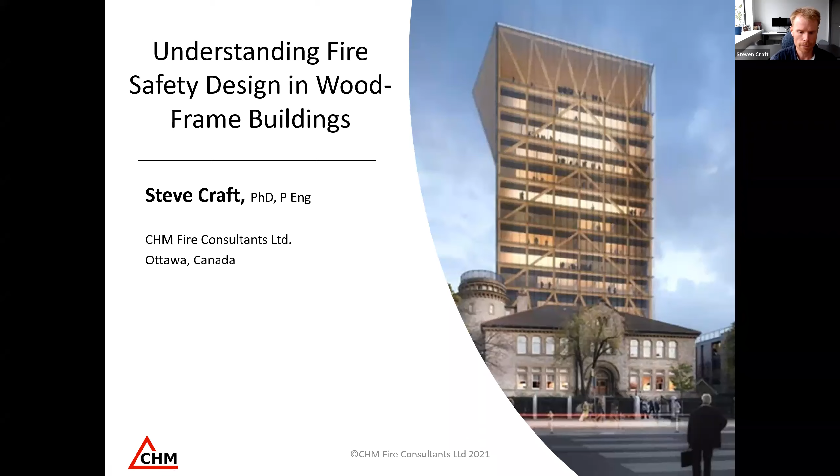So in today's presentation, we'll just briefly go over the mid-rise construction requirements that were added in 2015 to the National Building Code. This was a big change, of course. Before the 2015 National Building Code, buildings were limited to 4 stories of light frame wood construction, combustible construction. With the changes in 2015, buildings can now be built up to 6 stories, and it created a new group of buildings that we'll look at.

After we review that, we'll look at fire resistance. In particular, we'll take a look at the test method. I think it's helpful to look at the test method and remind everyone how we actually test assemblies for these buildings, and then look at some of the design options for light frame wall and floor assemblies. We'll also look at exterior walls. The 2015 mid-rise provisions for combustible construction include some requirements for exterior wall assemblies, such as testing to CAN/ULC S134, which previously didn't really apply to combustible buildings. So that was new. And then lastly, I'll get into a little bit on construction site fire safety, just touching on some of the highlights with respect to that. Again, we could easily spend the entire presentation on that alone.

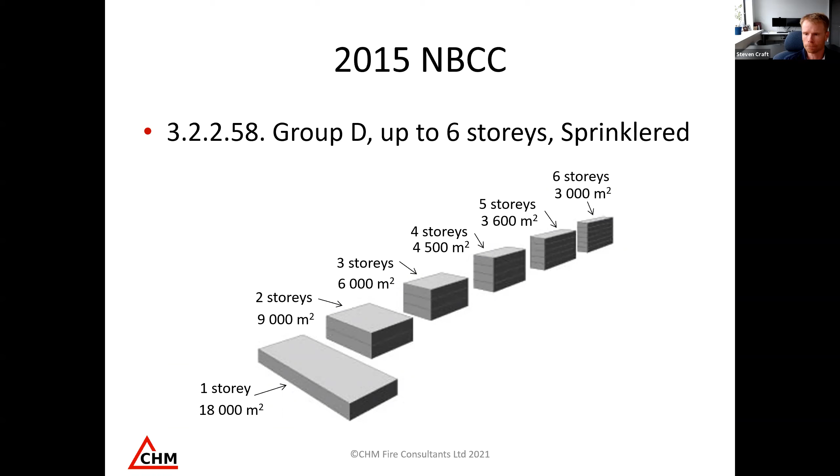Just a bit more on these buildings and what's permitted. In addition to residential occupancy, Group C occupancy permitted up to 6 stories, there are allowances to incorporate Group A Division 2, so that might be a cafe or restaurant on the first 2 stories. Group E mercantile could be a store on the first story. Also storage garages, basically underground parking or parking up to the 3rd story. So there are allowances for mixed occupancy in the buildings.

And of course, in some of those cases, if we have Group A Division 2 or Group E occupancy, then we'll have an increased fire resistance rating for the fire separation between the occupancy and Group C.

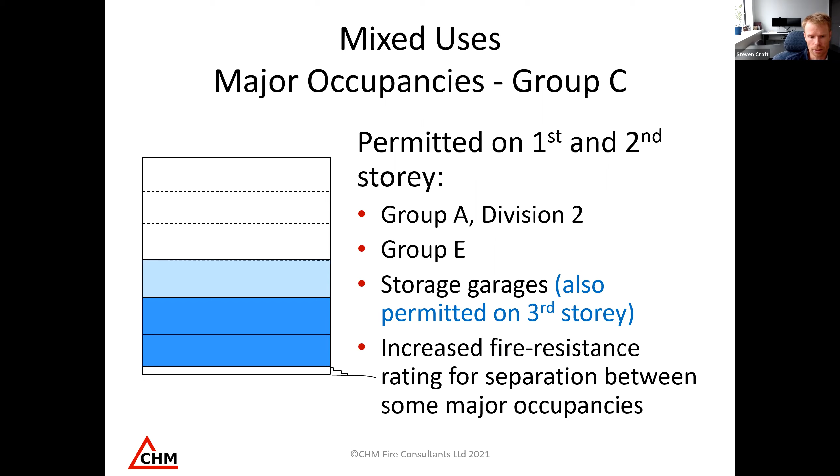Similarly, for Group D occupancy, we have Group A Division 2 and Group E on the first 2 stories, storage garage permitted up to the 3rd story. But in addition to those, which are also allowed for residential buildings, we also allow Group F Division 2 and 3 on the first 2 stories.

I think these provisions recognize the increased use of mixed use buildings where we have either stores or restaurants on the first story and residential above. These provisions for mixed occupancy are used quite often.

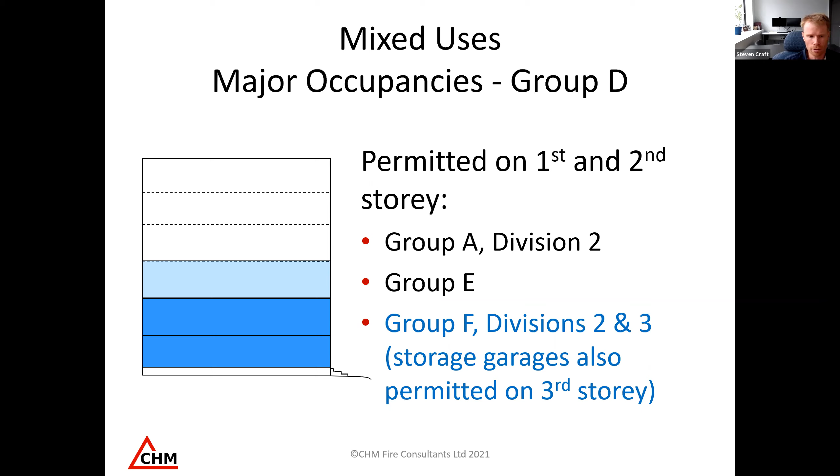Some of the restrictions placed on these buildings, the first being the height of the building. This ensures a 6-story building doesn't end up being a 12-story building with a mezzanine on every floor. The height from the first story to the uppermost floor level is limited at 18 meters. So whether it's the 6th floor or a mezzanine above it, that top uppermost floor is limited to 18 meters above the first floor, keeping the height of the building in check.

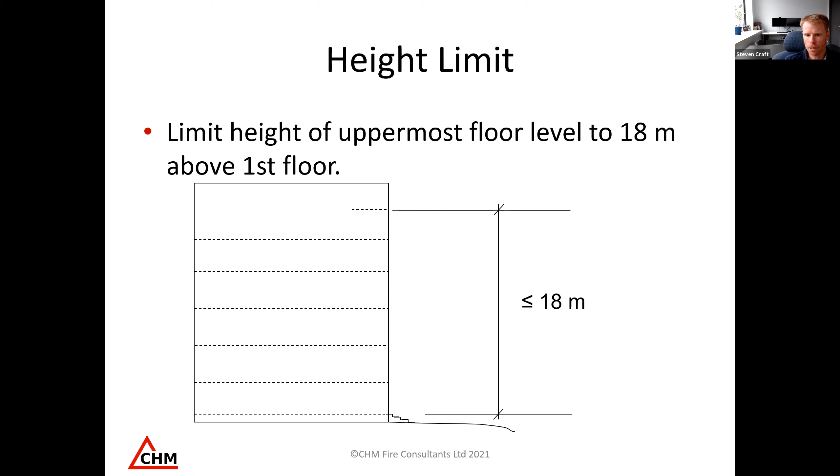Additionally, something that isn't otherwise required in the building code is the fire resistance rating for the roof. Typically in a sprinklered building, in the National Building Code, there's no requirement for roofs to be rated. However, this is an exception where, to increase fire safety, they've added a fire resistance rating for the roof of 1 hour, similar to the rest of the building.

There are requirements if the roof is less than or equal to 25 meters in height from the first floor: the roof covering has to be class A, B, or C, and the roof itself can be combustible construction.

However, once the roof goes over 25 meters in height, it has to be either non-combustible construction or fire retardant treated wood construction with a class A roof covering. So as the roof height increases beyond 25 meters, provisions for non-combustible or fire retardant treated wood roof construction come in, which can be a bit challenging. Generally, roof heights are kept below 25 meters where possible.

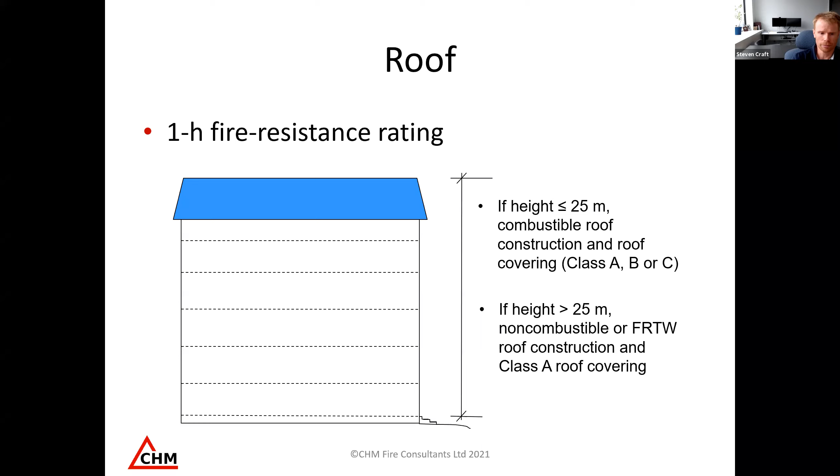The next big change that allows for these 5- and 6-story buildings to be constructed is an upgrade of the sprinkler system. For those unfamiliar, there are 2 sprinkler standards typically applied to these types of buildings. Up to 4 stories, NFPA 13R was permitted for residential buildings in previous versions of the code, as well as the current version.

There are certain relaxations under NFPA 13R that aren't required under NFPA 13. For instance, one of the big ones is the attic space: for a building sprinklered to NFPA 13R, the attic space does not require sprinklers, whereas if it's sprinklered to NFPA 13, it does. Other things like small closets — NFPA 13 is more restrictive on treatment for combustible concealed spaces.

Things like elevator machine rooms and penthouse equipment rooms need to be sprinklered in NFPA 13, whereas they don't in 13R. Overall, designing the sprinkler system to NFPA 13 will generally result in a greater sprinkler density, greater water density being applied to a fire in the event the system activates.

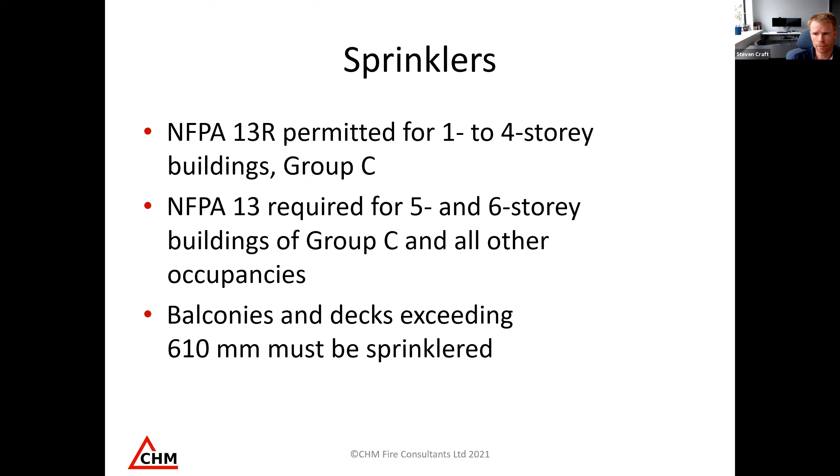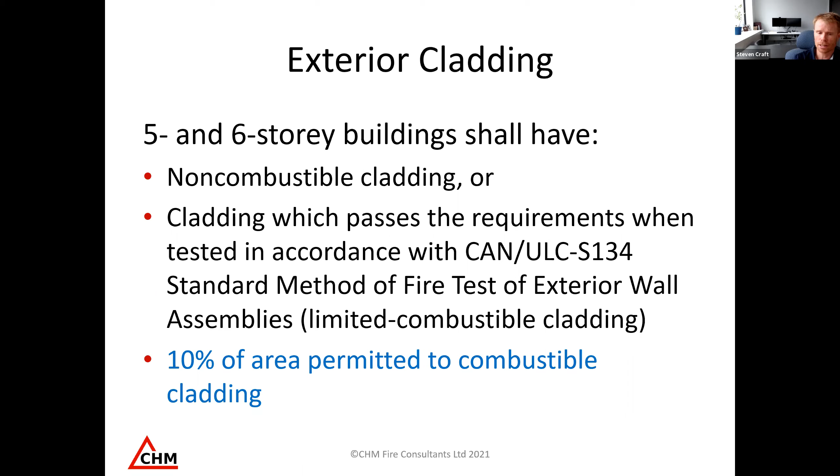In addition, for these 5- and 6-story buildings, the cladding must be either non-combustible or pass requirements when tested to ULC S134. I'll come back later and take a quick look at that test method. There is an allowance for 10% of the area to be combustible cladding, so a small area can be combustible, but otherwise it needs to either be non-combustible or meet ULC S134 for those 5- and 6-story buildings. If it's using the greater areas but is only 4 stories or less, combustible cladding can still be used.

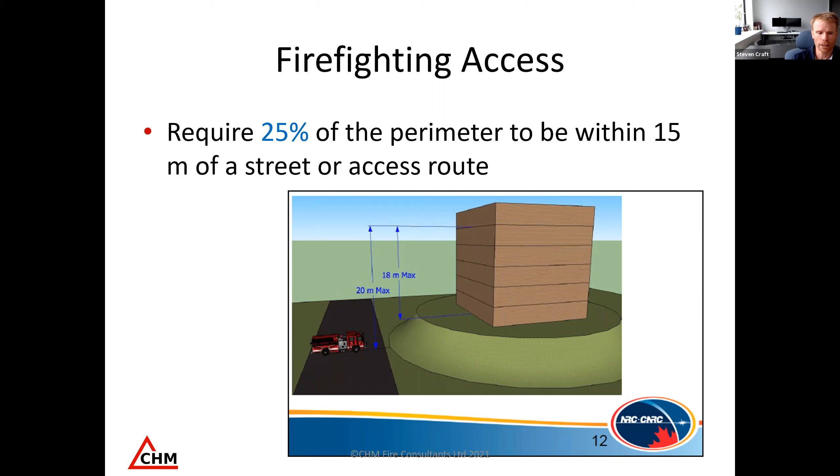Another aspect for firefighting access: in addition to the maximum height of the building of 18 meters from the first floor to the top floor, there's also a maximum of 20 meters from the access for the fire department to the top floor. That allows for a 2 meter drop between the first floor and where the fire department access is. If the fire department access is below that, it limits the height of the building. There's also a requirement for 25% of the perimeter of the building to be within 15 meters of a street or access route. This is for firefighter access, and depending on location, if it's an infill project, that can be a limiting factor on the building size.

Just a couple other changes to the code for these mid-rise provisions. One aspect is fire blocking, and generally there are more requirements for fire blocking, so smaller areas are permitted unless the areas are filled with non-combustible insulation. That's another case where combustible concealed spaces are addressed in a more rigorous way. Also, the emergency power supply for lighting and fire alarm systems is doubled in duration to 1 hour.

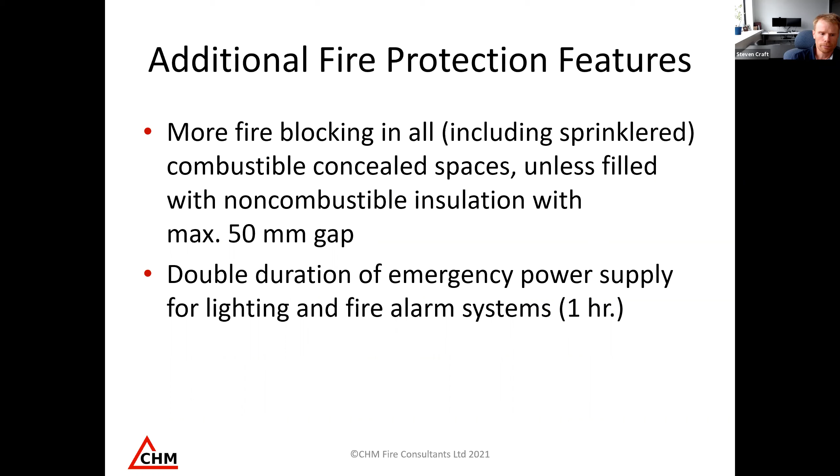You can appreciate some of these changes, particularly the sprinkler system, really add to the fire safety of the building. In general, out of everything we do in building design for fire safety, nothing compares to sprinklering the building. When the building is sprinklered, from a risk perspective, looking at risk to occupants and risk to property, there's no other change to the building we can make that will come close to offsetting the risk that the sprinkler system provides. They're very effective, and that's why they're required.

One of the aspects that needs to be considered in building 5- and 6-story buildings is shrinkage. Generally, engineered wood products are largely used on these projects, so we don't see large amounts of shrinkage in any one member, but when we build 6 stories, it's a cumulative effect from story to story. The structural engineer will design for shrinkage, the structure itself, and any interconnection between the structure and things like elevator shafts, or if the exit stairs are non-combustible construction.

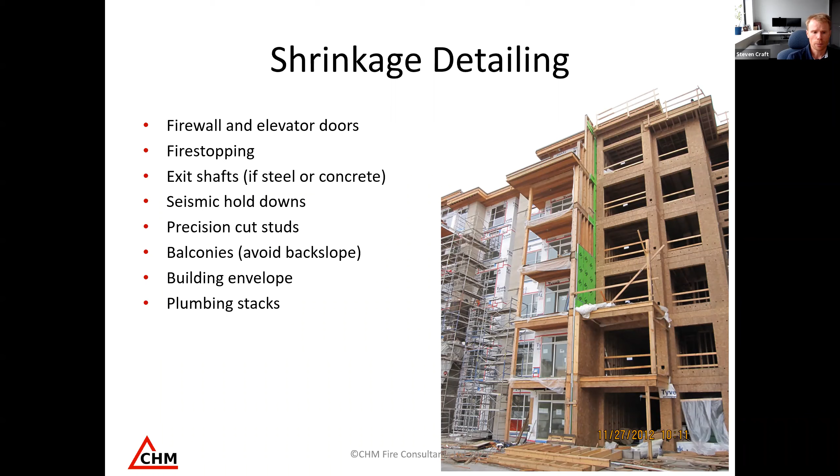And so that's something that needs to be accounted for. Which brings me to the next issue: firewalls. Shrinkage and firewalls need to be taken into account, because firewalls are not going to settle or shrink to the same degree, perhaps not at all. So we need to allow for some movement between whether it's a masonry block wall or a proprietary gypsum board firewall.

Typically that movement allowance would be provided by the structural engineer. There are ways, of course, to minimize that movement, whether it's precision cut studs and prefabricated walls, or the use of engineered wood products that generally have lower moisture content or less shrinkage.

With respect to firewalls, we see both masonry block as well as proprietary gypsum board firewalls being used. I will say that not all municipalities currently accept proprietary gypsum board firewalls. There are challenges in detailing those. Generally, when gypsum board firewalls are used, there are no penetrations put through those walls. Often doors are required, and in some cases we see that in the vicinity of the firewall within the corridor, where the doors will be, it's masonry block, and then outside of that it might be the gypsum firewall.

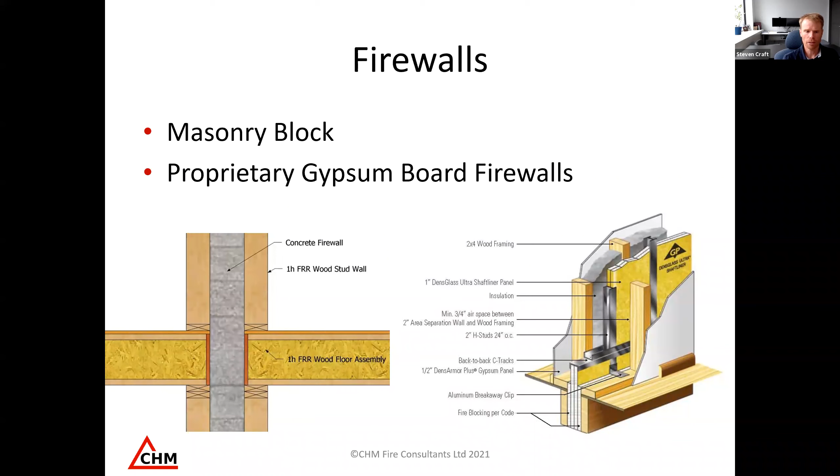So at this point, we'll move on to fire resistance, and I'll touch on the test method a little bit, and then speak briefly to design and what the options are.

Likely everyone's familiar with the fire resistance test method, CAN/ULC S101, in terms of the code requirement for fire resistance. Generally, when we require fire resistance, there are two primary objectives we're trying to achieve. The first is to prevent the spread of fire from one compartment to another, whether through temperature rise on the backside of a wall, or penetration of hot gases through that wall or floor assembly, which might allow ignition on the other side. The other aspect is to prevent collapse of the structure. For that reason, when we test for fire resistance, if it is a load-bearing structure, we'll test it under load.

In Canada, we have CAN/ULC S101. You may come across tests conducted in the US under ASTM E119. This US test method is almost identical to the Canadian standard. There are a couple of small differences, but in general, when tested to the ASTM method, it's likely applicable in Canada. Other parts of the world, including Europe, Asia, Australia, and New Zealand, use the ISO method, ISO 834. It has a slightly different temperature exposure, so it's not very common that someone looks to use an ISO 834 test in Canada, but from time to time it does happen.

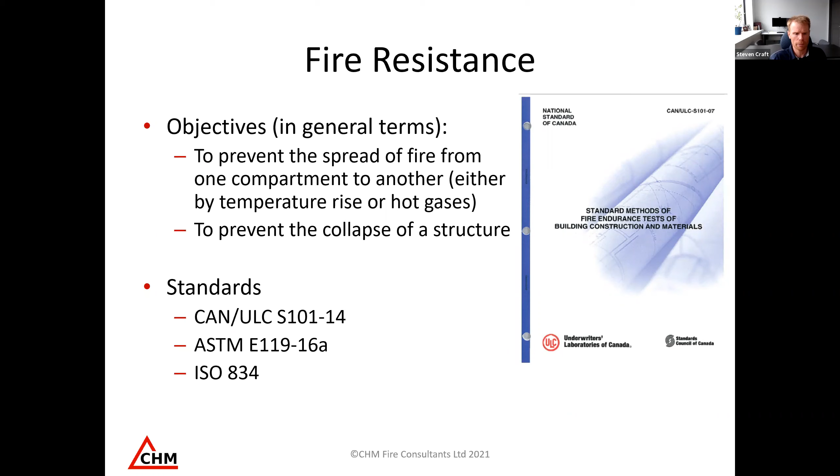So just a little bit on the test method, and we'll look at the furnaces we test these on. In general, we're trying to test construction that's representative of what's being built in the field in terms of materials and workmanship.

When we're testing a load-bearing wall, for instance, we'll load it in the test frame, and we'll see that in a second. Of course, walls may or may not be load-bearing. Floors are always load-bearing, and beams, columns, and other structural members will always be load-bearing.

To give you an idea of the size of assembly we're testing, in the standard test most furnaces are on the order of about 10 feet by 10 feet. So for a wall assembly, that's the size we're testing, in order to extrapolate those results to walls that are taller and wider. Similarly for floors, a typical floor furnace is on the order of 4 by 5 meters, or perhaps 14 feet by 19 feet, something on that order.

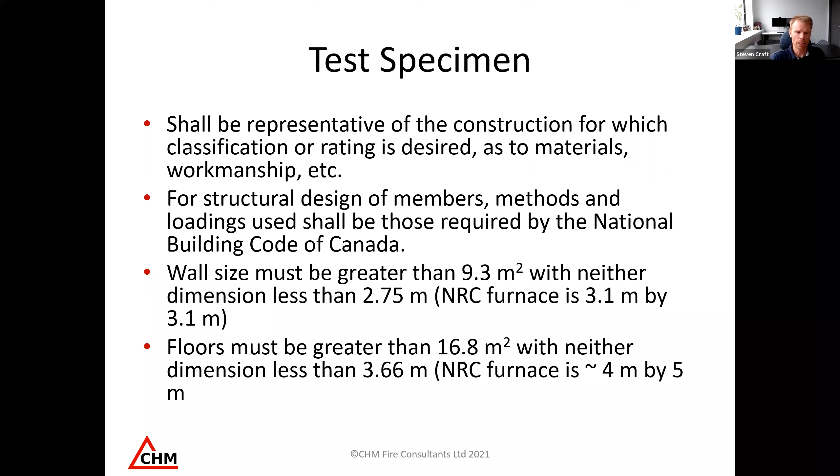Just quickly, in terms of the fire exposure that we're applying to a wall or floor assembly, or perhaps a column, the intent originally is to represent what we call a post-flashover fire, so a fully developed fire in a compartment that's limited in size only by the oxygen able to get into that compartment. In the first 20 minutes or so, we're already up to probably about 750 degrees Celsius, so that's already getting very hot.

And of course, at an hour, we're at about 927 degrees Celsius, and over 1,000 degrees Celsius at 2 hours. This curve does continue out to 4 hours, but most assemblies we test are 1 or 2 hours, perhaps, or less, 45 minutes.

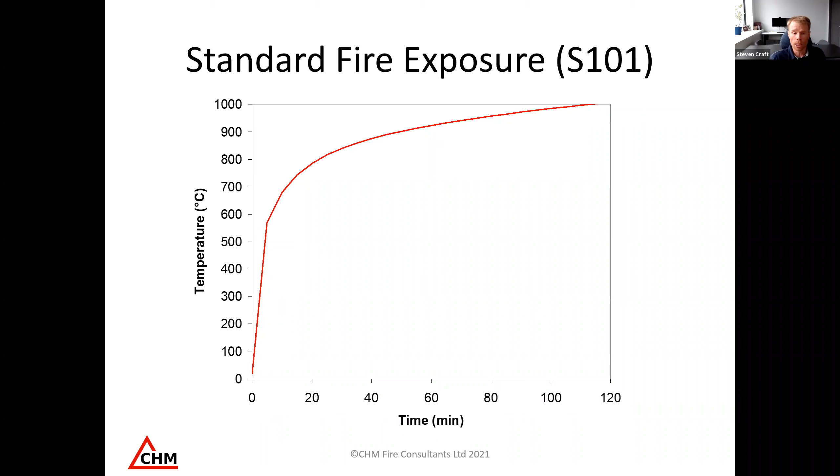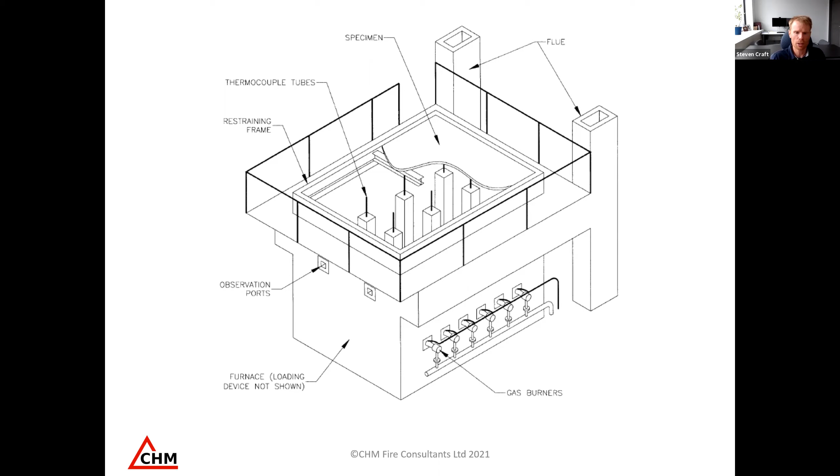Usually there's observation ports that allow us to see inside, and we have the floor assembly, which sits on top and makes up the top of the furnace. There's thermocouples measuring the temperature just below the floor assembly, and so the furnace is controlled to follow that temperature-time curve from the previous slide. What's not shown here is the loading applied to the top, which we'll see in the next photo.

Similarly, for a wall furnace, same kind of premise where we have a plenum where the gas burners are reproducing the temperature-time curve within this plenum. We have thermocouples measuring the temperature in that space, reproducing that fire. We have viewing ports on the sides, and then a test frame where the wall assembly sits. Usually there's hydraulic jacks either above or below that allow the wall to be loaded.

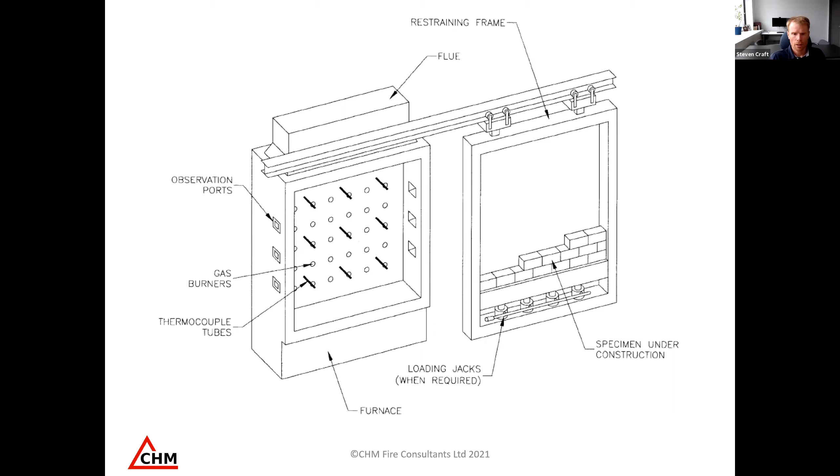So just a quick note on load. Generally speaking, when we test for fire resistance, we load wall and floor assemblies to basically the full design load. In the standard, it's called the full specified load condition. That's generally how we test assemblies.

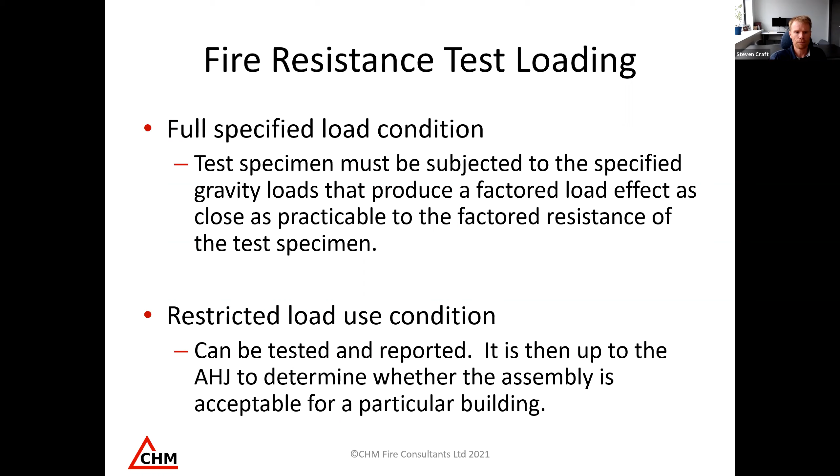However, in some cases, for one reason or another, we may decide to test at a lower load, and then that would be reported, whether in a test report or in a subsequent listing. There would be a restricted load use condition, so there'd be a restriction on the load that could be applied for that particular fire resistance rating. So that's one thing to watch out for.

I think it's important to understand the failure criteria for fire resistance. There are 3 failure criteria, and all 3 may not apply to every assembly. So for instance, if we're testing a wall assembly that's load bearing, all 3 of these would apply. First is transmission of heat.

So first is transmission of heat: during the test, the average temperature measured on the unexposed side of the wall shall not rise more than 140 degrees Celsius above the initial temperature at the start of the test, or 180 degrees Celsius at any point. That's looking to prevent fire spread from one side of the wall to the other.

Second is support of the load: the test specimen shall sustain the applied load throughout the test. And lastly, passage of flame or hot gases: the assembly shall prevent the passage of flame or gases hot enough to ignite a cotton pad on the backside. So this is really looking at the ability, again, to contain the fire.

So you can appreciate for a load-bearing wall, all of these would apply. For a non-load-bearing wall, only the transmission of heat and passage of flame would apply. And for a beam or column, only the support of load would apply where it's not a fire separation.

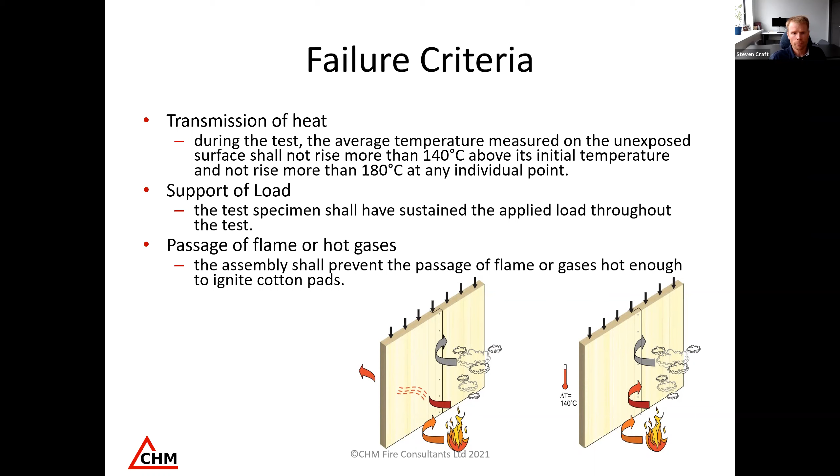Generally speaking, these mid-rise wood buildings, anything 4 stories to 6 stories, are going to require a 1-hour fire resistance rating for the floors and the supporting structure. In light frame construction, that would be the walls requiring a 1-hour rating. If we have mixed occupancy, such as mercantile on the first floor, or perhaps a restaurant, A2, then we'll have a 2-hour fire separation between that occupancy and the occupancy above, if it's residential. But for the most part, these are 1-hour fire resistance rated buildings.

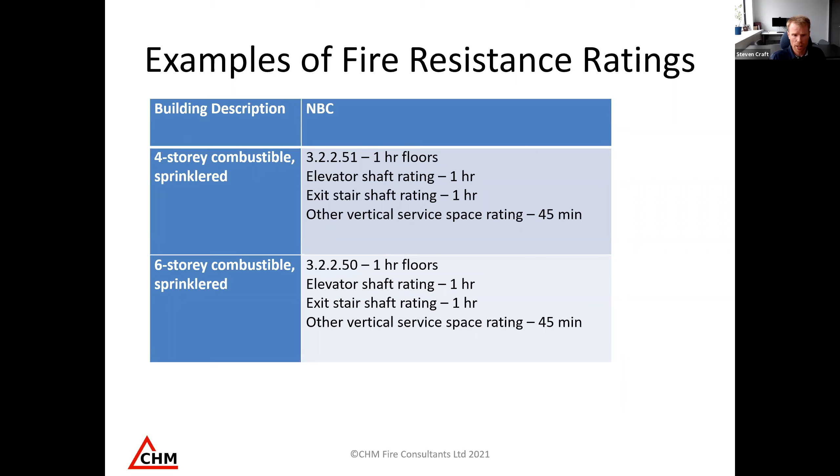If we look at, from a design perspective, what are our options to design the building for fire resistance? First, there's a component additive method in Appendix D of the National Building Code. It's been significantly improved from the 2010 version, with a lot more combinations of assemblies now that can be designed using it. We'll take a quick look at that.

And then, of course, there's listings from whether it's ULC, Intertek, or QAI. Those listings can be found in the published directories from each of those organizations, although sometimes those directories can be a bit cumbersome to find assemblies in. Other methods: often manufacturers in their literature will cite their listings and provide links or at least listing numbers. Another great resource is the Gypsum Association's design manual. They have many light frame, wood and steel frame assemblies in that manual, and where applicable they will reference the listing if there is one, or perhaps other test data used for that assembly.

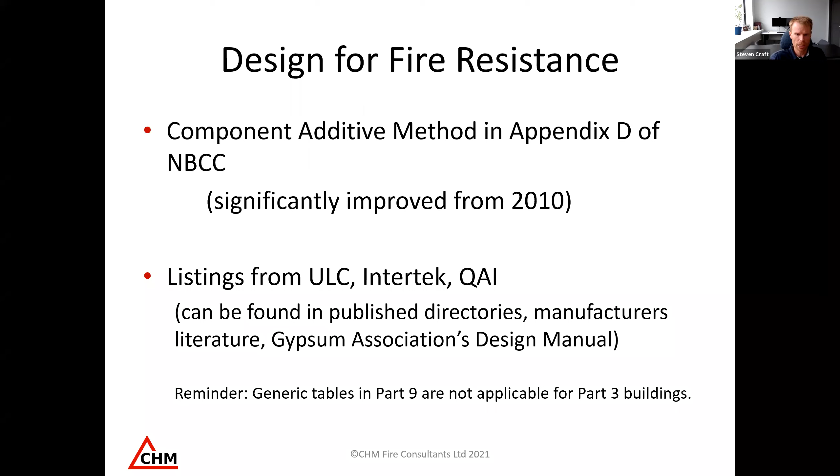So if we just look quickly at the component additive method: the original version was based on tests completed in the 50s, 60s, and 70s, and it wasn't significantly updated until the last edition, the 2015 National Building Code. There were probably something on the order of 80 to 90 fire resistance tests conducted at NRC in the late 90s and 2000s, and that information was used to update the component additive method. We'll see on the next slide that there's a lot more combinations of materials.

It's important to remember, though, the component additive method can only be used to determine fire resistance ratings up to 90 minutes. So when we have 2-hour assemblies in light frame, we need to go to either listings or another method.

The assigned times... one of the challenges with the component additive method is that it's often used inappropriately, when numbers are cited for different components on their own.

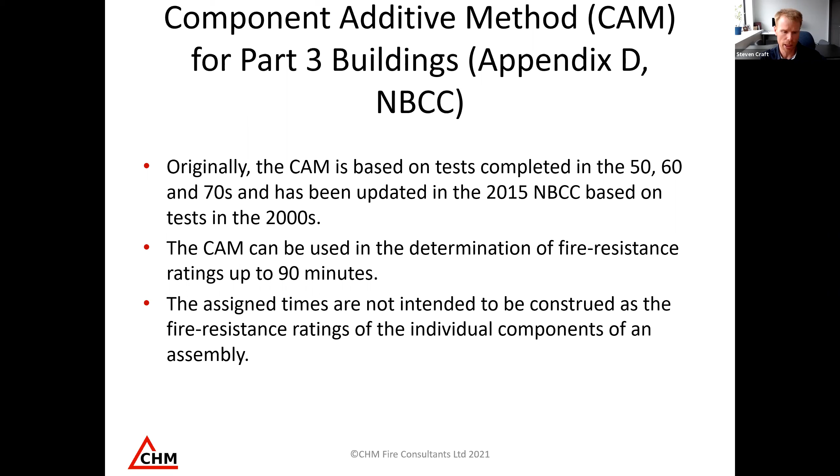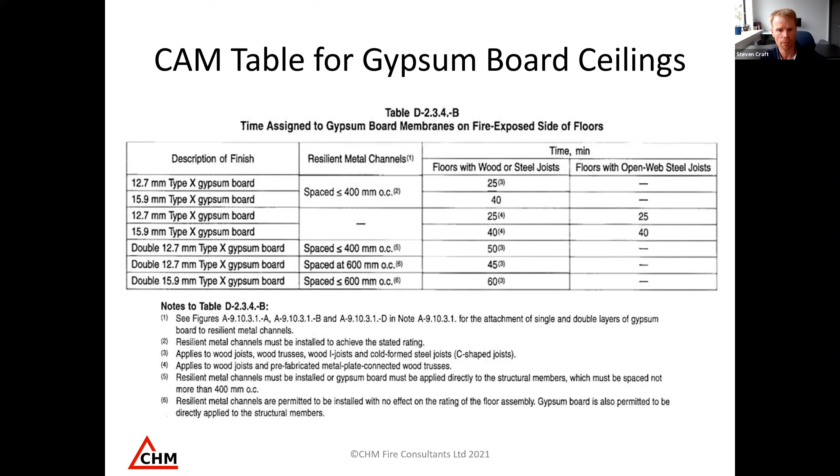So there's something being left out there. I'm not sure offhand which one it is, but each of these have those footnotes. But also, in addition to this, later on in this section of Appendix D, there are requirements for the framing, for fastener spacing, and for exterior walls, the sheathing, which need to be adhered to as well in order to use this method. So it's important to read all of the notes and requirements and not just look at the tables.

For listings, listings are one of a very common way, particularly for manufacturers, to test and market their products. So I mentioned there's generally 3 accredited certification organizations in Canada providing listings accredited by Standards Council Canada. This includes ULC, Intertek, and QAI. There are others accredited, but those are the main ones providing listings for building products in fire.

One of the important things to recognize with a listing is that it's not just the fact that the material has been tested and successfully completed the test, but part of that listing is the quality assurance that goes behind it. So the accreditation or certification body will make sure that the product is being manufactured under a quality system, so that the product used a year from now will perform the same as what was tested. And they'll often do periodic testing of the products to make sure the product's not changing over time. So there's follow-up, basically, as opposed to a manufacturer using a fire test from perhaps 20 or 30 years ago.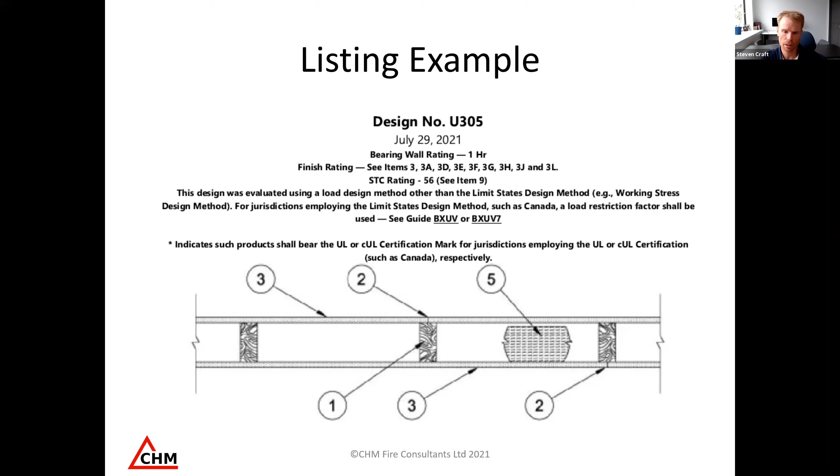Lastly, I'll just mention the generic tables under Part 9 of the Building Code. These tables, again similar to the component additive method, were significantly increased in number in both the 2010 and 2015 national codes based on the testing done at NRC. I think there's hundreds of assemblies now in these tables, providing both fire resistance rating as well as sound transmission class ratings.

However, it's important to point out that these are in Part 9, and so these are not applicable to Part 3 buildings. If you're designing a Part 3 building, you cannot rely upon these generic tables—you'll have to either use the component additive method or listings for fire resistance ratings.

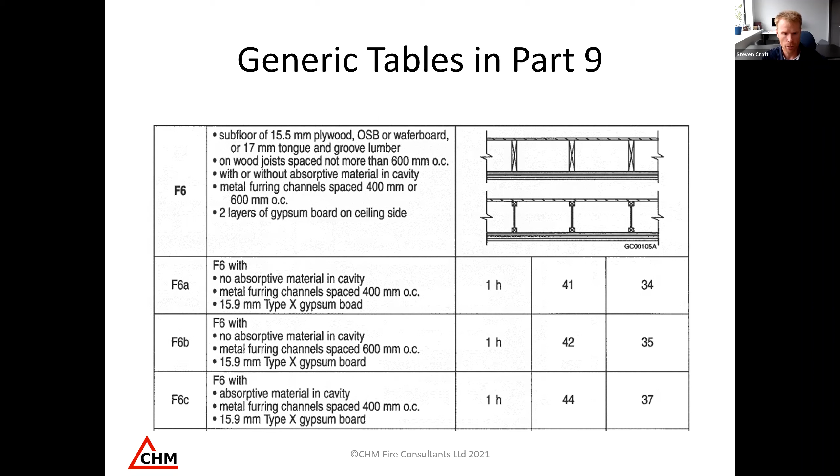Moving on to exterior wall assembly, as I mentioned, for mid-rise 5- and 6-story light frame buildings, the code requires either non-combustible cladding or cladding tested to CAN/ULC-S134.

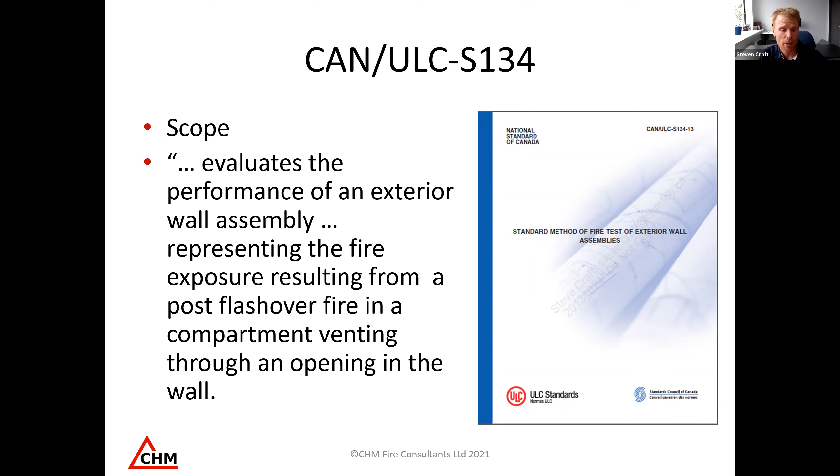One thing I should point out is that CAN/ULC-S134 as a standard is testing an exterior wall assembly—it's not just the cladding that we're testing. This is one of the challenges in applying CAN/ULC-S134 test results: it's very difficult to test every possible combination of materials used in exterior walls, because from one project to the next, there's often differences. The other aspect I'll point out is that this test method is, as we'll see on the next slide, a full-scale test method.

It's a full 3 stories high, or 34 feet high, the test apparatus. The test sample is on the order of about 33 feet high, so it's a full 3 stories. It's a very expensive test method, so it's not one that a manufacturer will test over and over.

With different combinations of insulation, for instance, because of the cost. In general, it costs the manufacturer something on the order of probably close to $100,000 to run this test, which is very unfortunate because it means we have very few tests, few listings to this test method. But with that being said, it's a very robust test method, so we have a lot of confidence in the results.

So just a little bit on the test method. It's 3 stories high. The minimum dimensions roughly 16.5 feet wide, and there's a compartment in the first story with a window opening. And this window opening basically allows a fire to exit the compartment and expose the exterior wall to a fire plume.

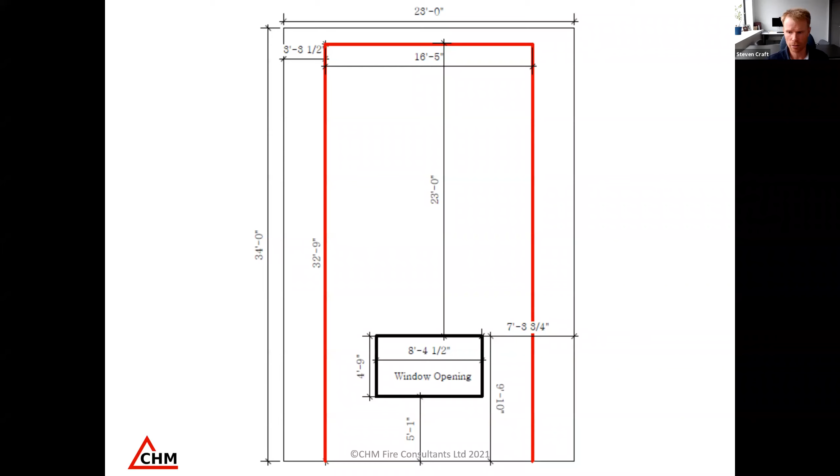Just before I go to a picture of the fire exposure, I'll point out in terms of duration, it's a 25-minute fire exposure, and the fire exposure ramps up from basically 0 minutes, the fire just starting, to at 5 minutes, the full amount of gas flow is flowing. So it's at its most severe from 5 minutes through to 20 minutes. So it's 15 minutes at the full exposure, and then linearly it ramps down from 20 to 25 minutes. So 25 minutes overall exposure with 15 at the peak.

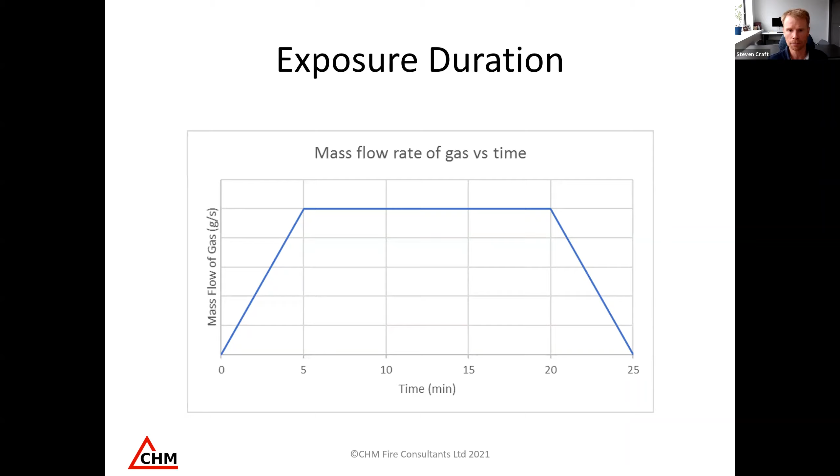There's 2 failure criteria in this test method. One is we're looking for flame spread on the exterior wall or in the exterior wall. And if that flame spread reaches 5 meters above the window opening, then that's failure. Also, there's a series of 3 heat flux gauges, 3.5 meters above the window, and those are measuring the heat flux back to the wall, basically the radiation back to the wall.

And if the exterior wall is contributing to this fire plume that's going up the exterior, and if it contributes too much, then we will see failure based on heat flux. So if the heat flux goes over 35 kilowatts per meter squared, measured at that 3.5 meter height, then that also constitutes failure. To give you an idea...

Fire retardant treated plywood can pass this test. It's kind of borderline. Sometimes it might pass, sometimes it might not. And so that's the level of performance that's required to pass this test. It's a very severe test and can be challenging to pass. So this is just quoting the 2 failure criteria I just mentioned from the code.

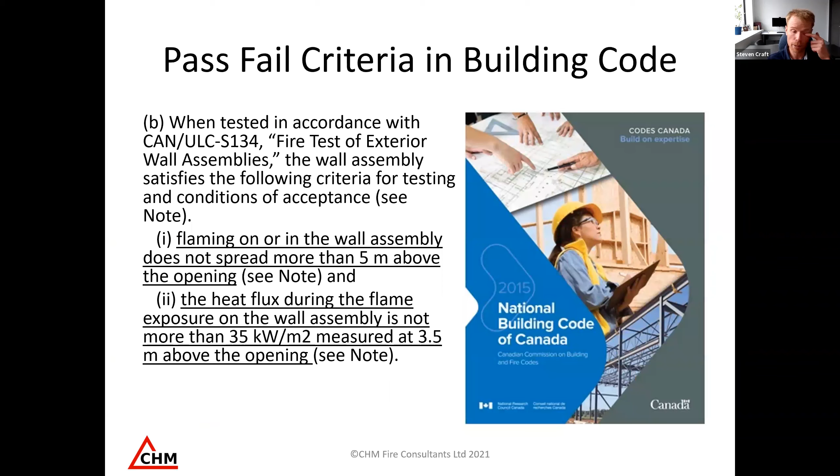For design, like I said, there are some listings available. There's not a lot of listings available, honestly. And those listings are generally for high-rise buildings where this test method's been applied previously. So for mid-rise buildings on combustible construction, there haven't been many tests. In fact, I think the only tests are likely the ones that have been done for research.

And so to that end, the next version of the National Building Code, which is currently being finalized or going through publication right now, which should be published by the end of this year, I believe. So that will be either the 2020 or 2021 National Building Code, and that will have 5 generic exterior wall assemblies, which could be used on combustible construction.

So they did tests with both fire retardant treated plywood as well as gypsum board over insulation, as well as a test with mineral wool insulation over cross-laminated timber. And in each case, the tests were successful. So those are being added on a generic basis to Appendix D of the National Building Code coming out later this year.

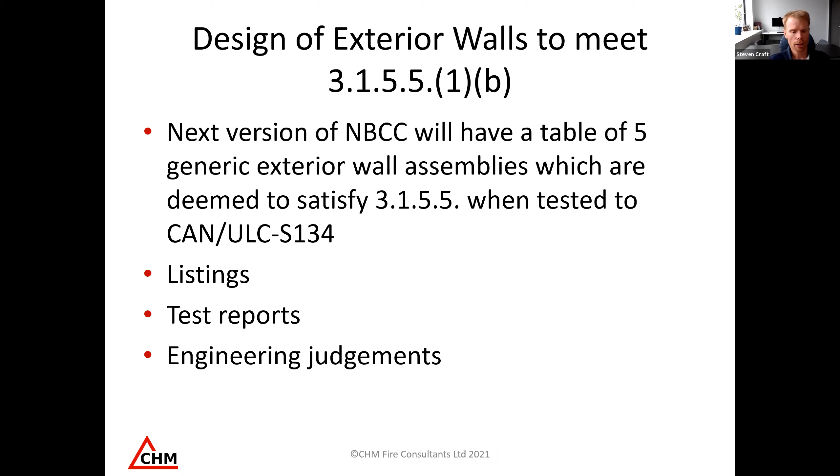So that wraps up exterior walls.

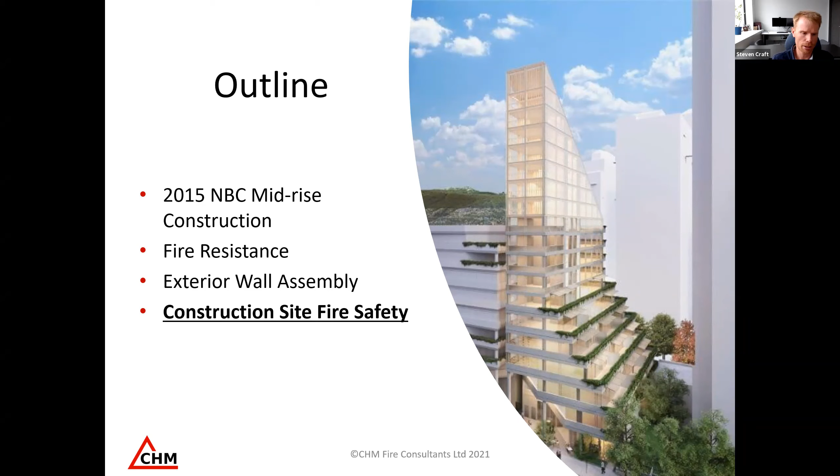I'd like to touch on construction site fire safety. For combustible construction, this is commonly a concern, particularly by the fire service. I'd say this is one of their biggest concerns when we adopted mid-rise construction in Canada using combustible construction.

So just a few things to put construction site fires in perspective. Construction site fires are rare, but when they do happen, they can lead to very large fires and large losses. They represent less than 0.2% of all fires. Generally, civilian loss of life and injury are low because often these sites are not occupied when fires happen, as we'll see in a minute.

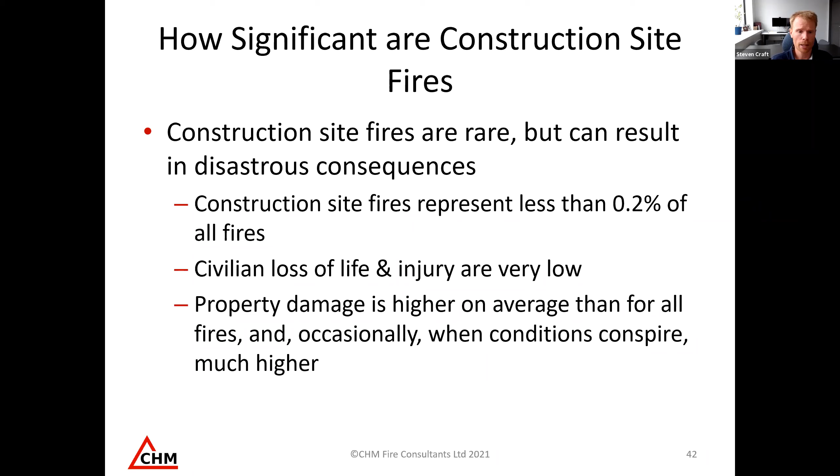Property damage is often higher than average for construction site fires because we don't have fire safety features in the buildings yet. And in some cases, when these buildings are in close proximity to other buildings, we can have much larger losses in the tens of millions.

So why can a fire during construction be a greater risk? There are many features in a finished building that are not yet in place. Fire alarm systems and sprinkler systems generally are not operational during construction. We often don't have compartmentation of the building because the gypsum board fire separations have not been constructed yet, and perhaps firewalls may not be up yet.

There's limited or no structural fire protection. Particularly in the case of light frame construction, you can appreciate it has very little fire resistance on its own without the gypsum board. Gypsum board provides 95% of fire resistance for light frame construction, and without it, the structure does not take long to start collapsing.

In addition to light frame, we also have the exterior sheathing and possibly some combustible insulation exposed. These sites are also at greater risk for arson and incendiary fires because the site is unoccupied during non-working hours, and we also have hazardous activities such as hot work taking place on site during this vulnerable stage. So that all sounds pretty grim, of course.

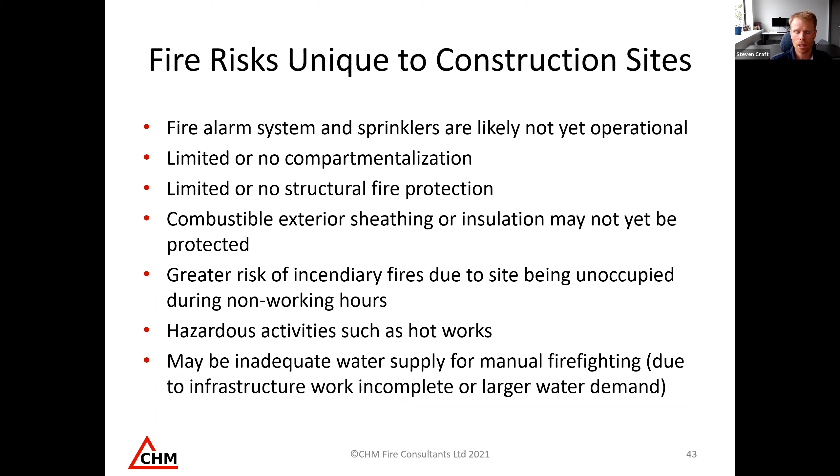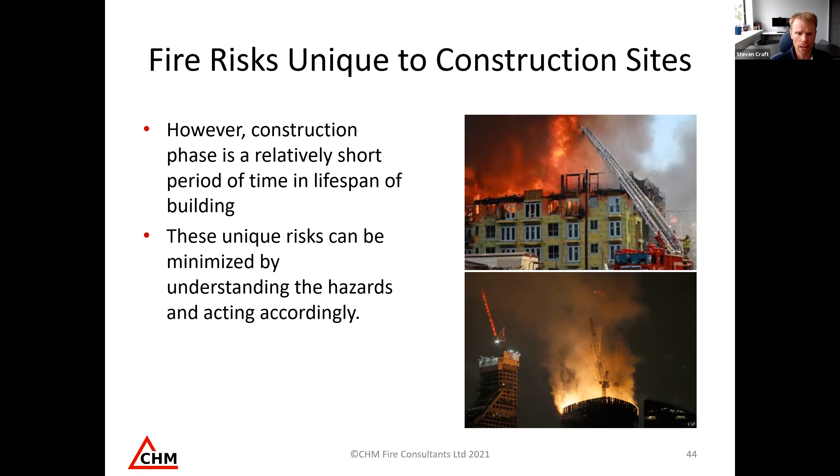I think we need to look at this in perspective - the construction phase is a relatively short period of time in the lifespan of the building, and we can take steps to mitigate these risks during construction.

In order to mitigate those risks, it's helpful to look at the main causes of construction site fires. This is a study the US Fire Administration completed 20 years ago. You'll notice the two main causes are incendiary or suspicious - that would be arson - on the order of over 40%, and open flame, largely representing hot work, on the order of 30%. So right there, 70% of fires are between suspicious causes and open flame.

Then lesser causes like smoking, heating on site, electrical distribution, and so on. But you can appreciate that if we can tackle those first two causes, we can go a long way to addressing construction site fires.

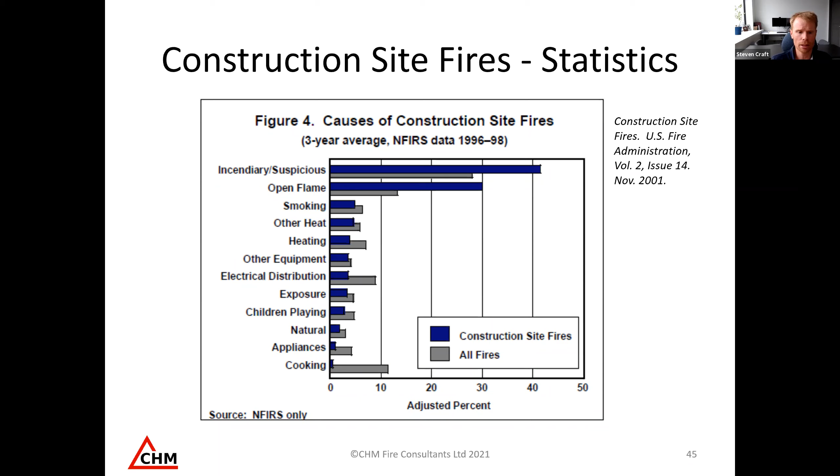Another study by NFPA, again 20 years ago, found similar numbers: 40% were incendiary or suspicious, open flame/ember/torches at 21%, and heating equipment at 10%.

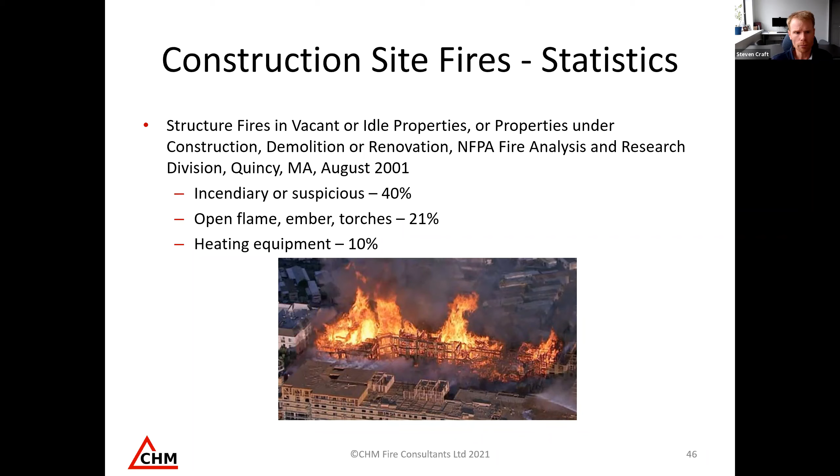Similar findings. Then lastly, in BC, more recently, there was a study looking at fire statistics from 2005 to 2009. Over that 5-year period, there were 275 construction site fires, and 63% were reported as incendiary, with 22% undetermined. Over those 275 fires, there were 10 injuries, 1 fatality, and property loss of 53 million.

One interesting finding was the timing of these fires - no surprise, the incendiary fires typically occur during off hours. Also, more than half of the construction site fires started on a ground floor.

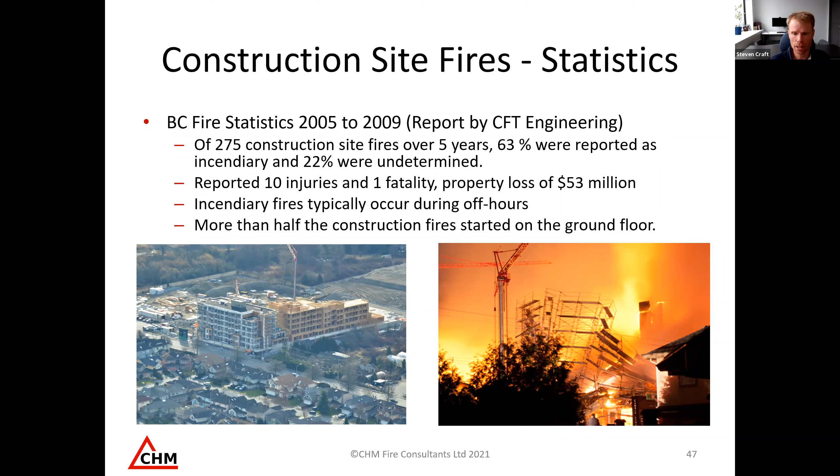So on that note, site security can be quite important to mitigate fires caused by arson. Whether it's having site security or making sure the first story is boarded up with perhaps a set of steel doors for entrances and windows closed up, this can go a long way to keeping the site secure.

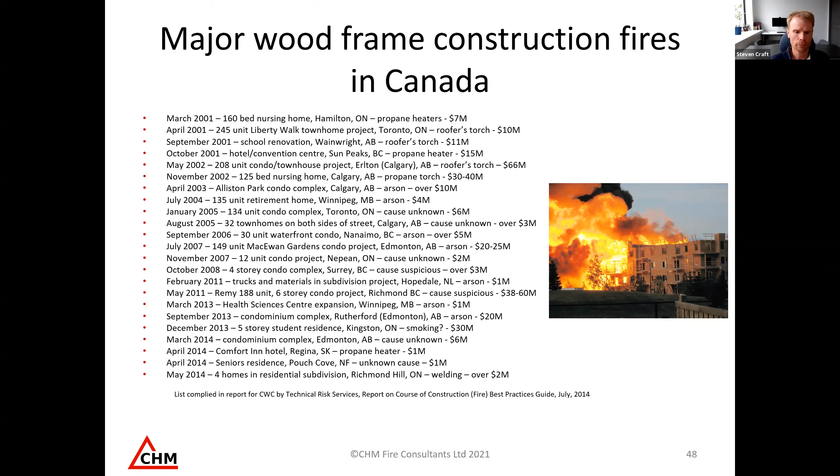So that's a note of caution. I won't go through the regulations too much, but just point out that the National Fire Code does have some requirements for construction site fire safety, both for hot work as well as site safety.

There are some guidance documents that have been written for BC and Ontario, who've adopted mid-rise a bit earlier, because you can appreciate the concern with 5- and 6-story light frame buildings is much greater than it was previously when we were building 3- and 4-story buildings.

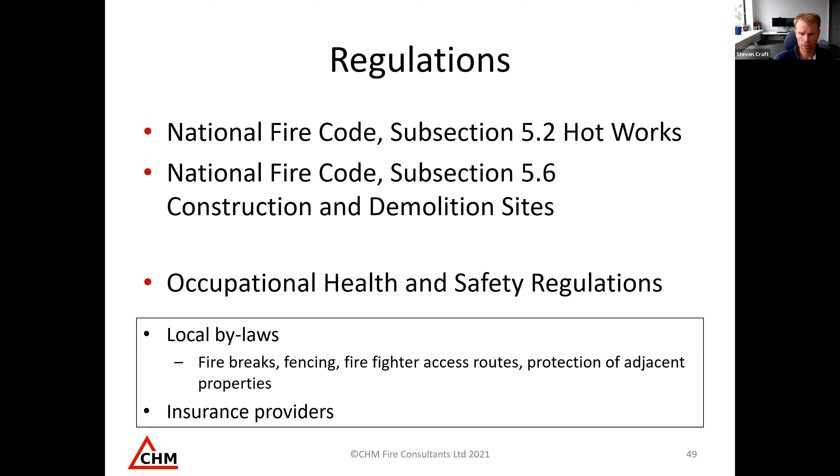In addition to those requirements in the National Fire Code, often there are local or provincial occupational health and safety regulations as well. There may be local bylaws, and insurance providers often have their own set of requirements that they're looking for the builder to follow, things like hot work permits and whatnot.

I'll point out there were some changes to the National Fire Code for the 2015 National Fire Code to reflect the changes to the building code to allow mid-rise wood construction. I'll just touch on a few of these.

Designated smoking areas, signs at the entrance of the property with the street address, and signs in the stairwells on each floor with the street address, floor level, stair location. That really comes down to a worker calling in a fire on site and having that information right in front of him, as opposed to trying to describe where the project is.

Things like dumpsters and bins and where they are placed next to the project. Water supply has to be available when combustible materials show up on site. Strong construction fencing is required, and there are minimum requirements for exits during construction.

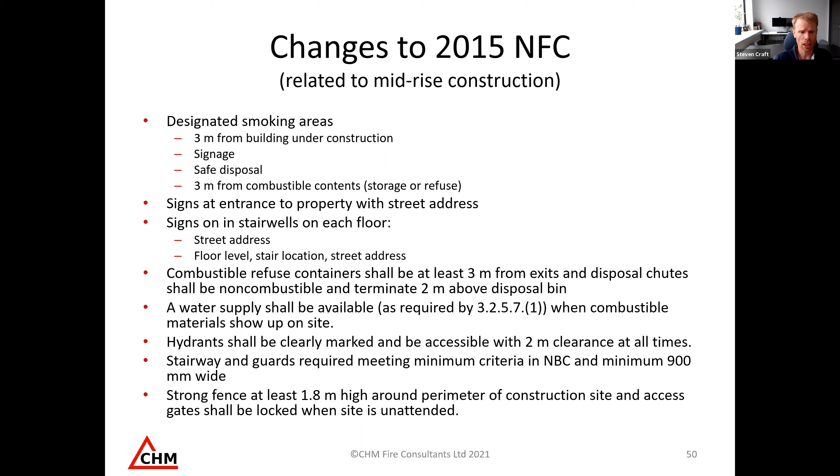A fire safety plan is required in the National Fire Code, and there are some documents available for guidance, particularly out of BC, that are quite helpful in developing a fire safety plan.

Some of the key steps are analysis of the site. What are the risks? Is it next to an apartment building with people sleeping at night, which is obviously going to be a greater risk than perhaps a building being constructed with no buildings around it.

Development of policies and procedures to minimize risks, so hot work procedures and perhaps designing out the need for hot work, whether it's welding or plumbing. Using materials that don't require hot work is a great way to avoid it, whether it's bolted connections or press fittings for plumbing, that sort of thing.

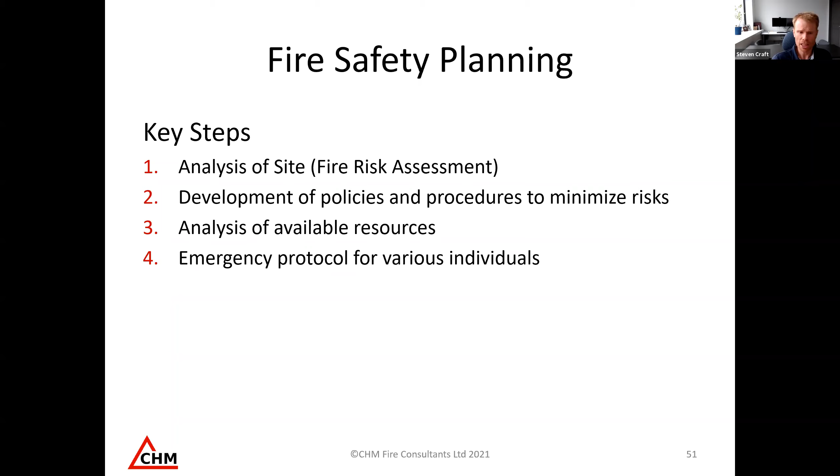Analysis of available resources, and then an emergency protocol for various individuals—who's responsible for what. That's a key part of developing the fire safety plan. There's a list here of some of the key aspects of a fire safety plan, which I won't go through.

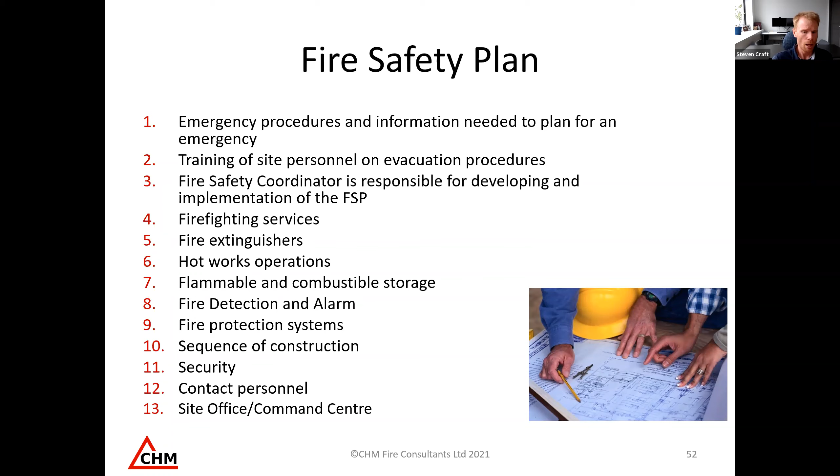Lastly, I'd like to wrap up with a mention of some testing that's going to be taking place in Ottawa next year. I'll talk about this a bit more next week during the webinar on mass timber, because this is really related to mass timber.

We're building a two-story structure that is quite significant in size, on the order of about 23 meters long and 15 meters deep, and we'll be doing a series of 5 different fires in this structure. The picture on the left is a demonstration test we were working on earlier this year in Richmond, BC, which was smaller scale—perhaps medium scale—about 20 feet by 20 feet in this photo, but really looking at fire performance of mass timber.

So that's just a bit of a tease for whether you're coming next week to the webinar, or just to keep an eye out for that, as we'll be live streaming. I expect these tests next spring, early summer.

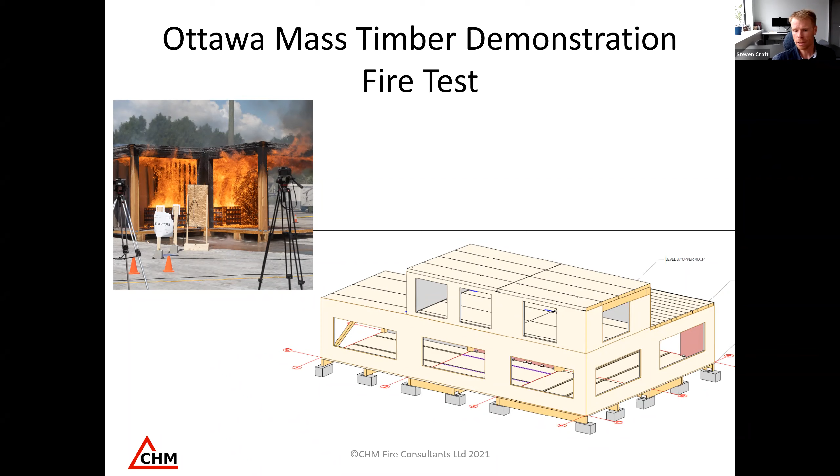So with that, I would be happy to take questions, and I hope that this has been informative and useful to the participants.